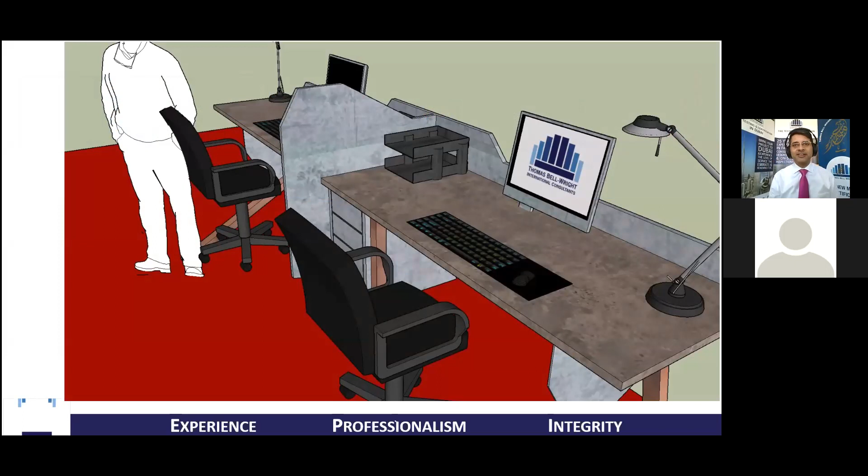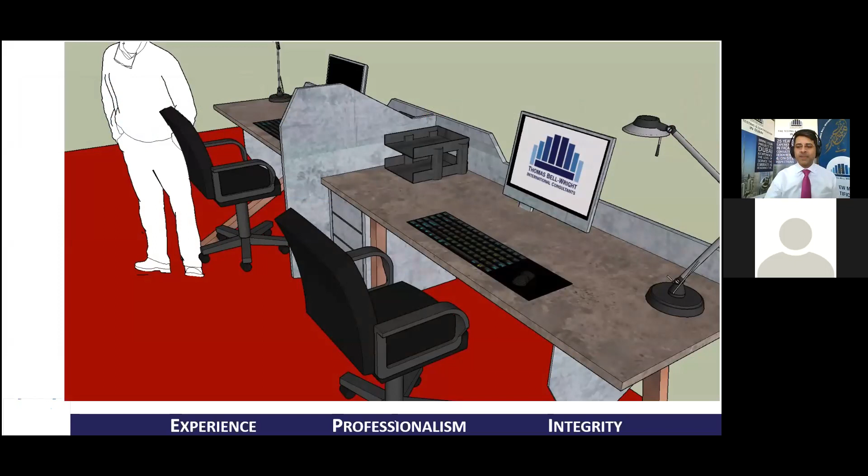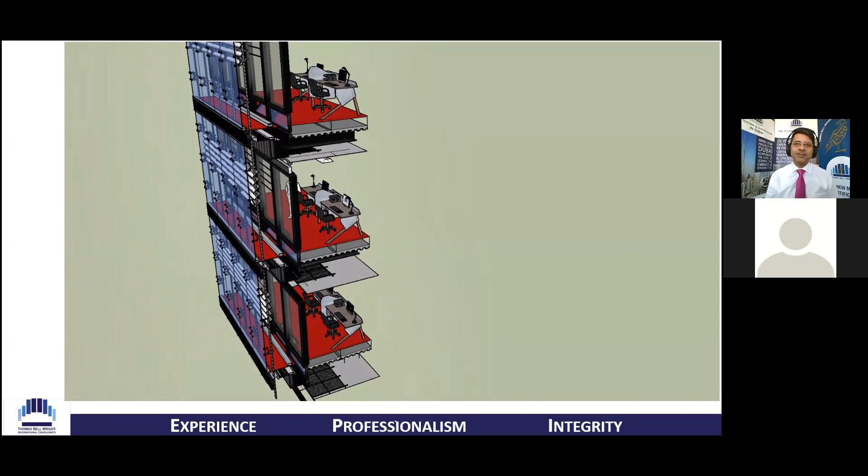And I'm going to start with talking about perimeter fire barriers, as the industry around us has had a very increased sensitization to building envelope and cladding fires. This is a subject that often pops up. And I'm going to begin with talking about the fact that, when we are sitting in our offices or homes, we sometimes don't quite realize the complexity of the systems as well as the materials that are used to bring about very basic properties that we often take for granted.

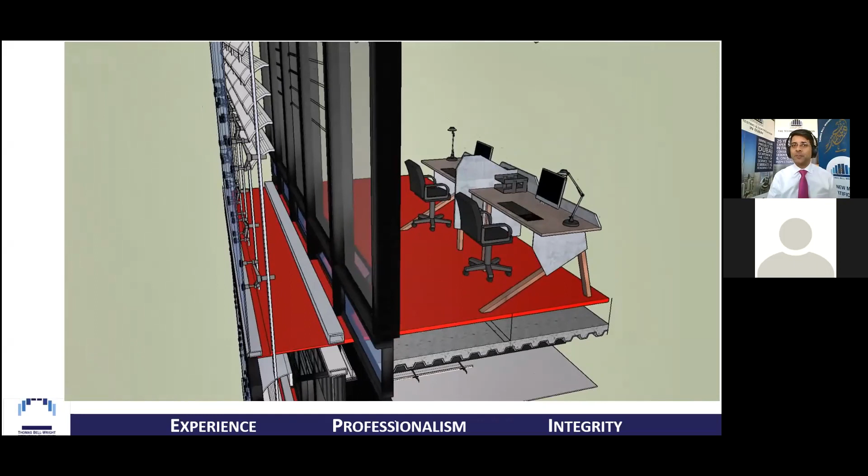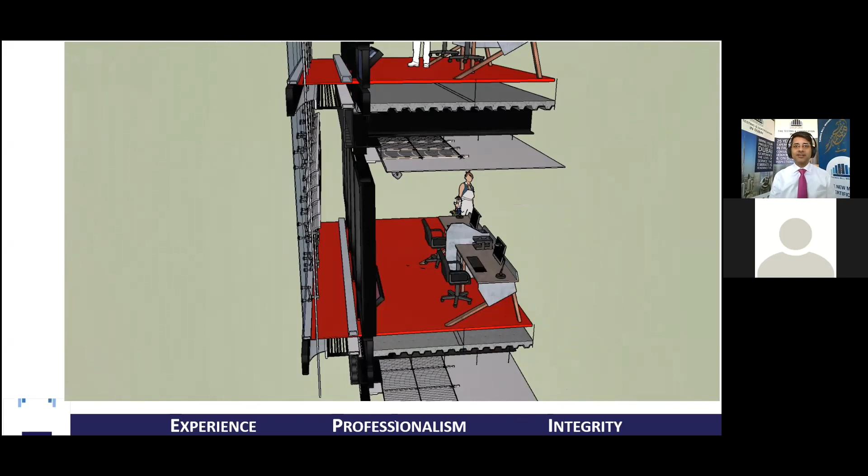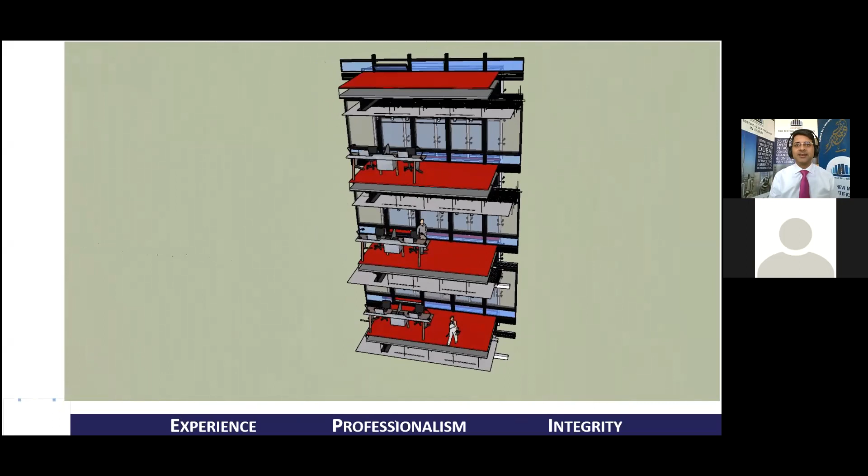The building enclosure or weather tightness or just the building comfort is one such thing where very often we forget what are the designs, materials, components that have been brought together to ensure a very large number of properties are delivered by the building envelope. So today we talk about one such material, which is the perimeter fire barrier.

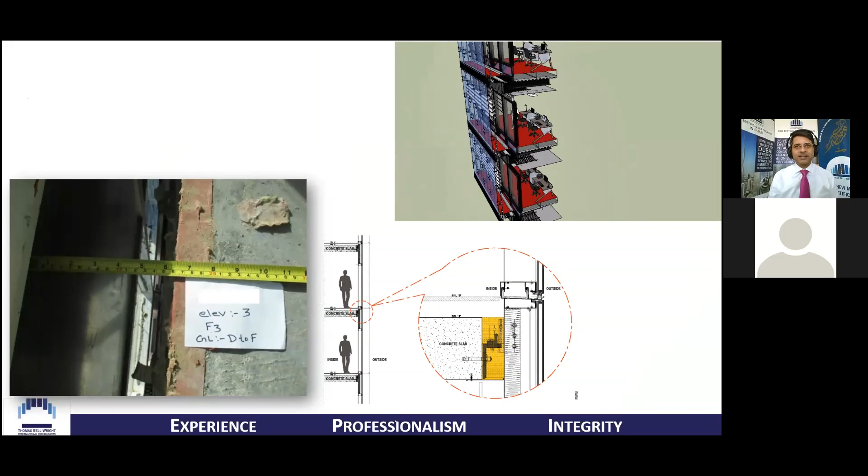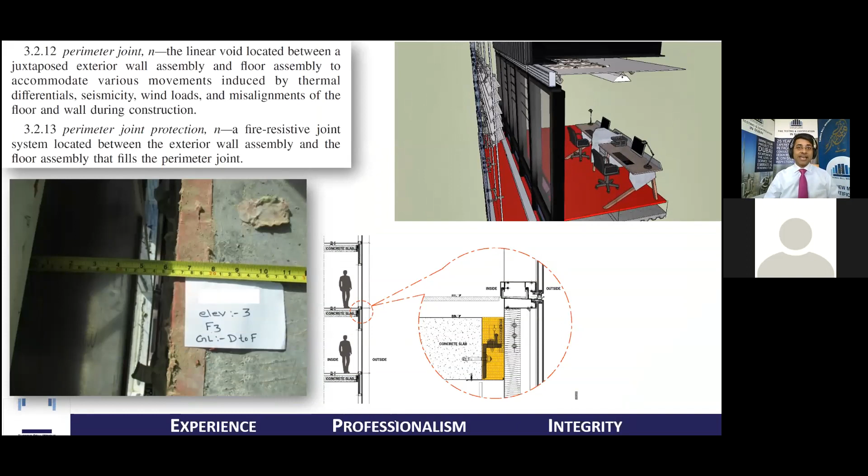The perimeter fire barrier is probably a relatively small looking material for a lot of people who may not even know. But its functionality is very, very critical to fire safety. What you see on the left as an image on your screen is a gap which remains from the slab edge to the building envelope or the curtain wall or the cladding system. And this slab edge is filled in with several types of materials with more than one functionality, but one such functionality which is very important for fire safety is the perimeter fire stop.

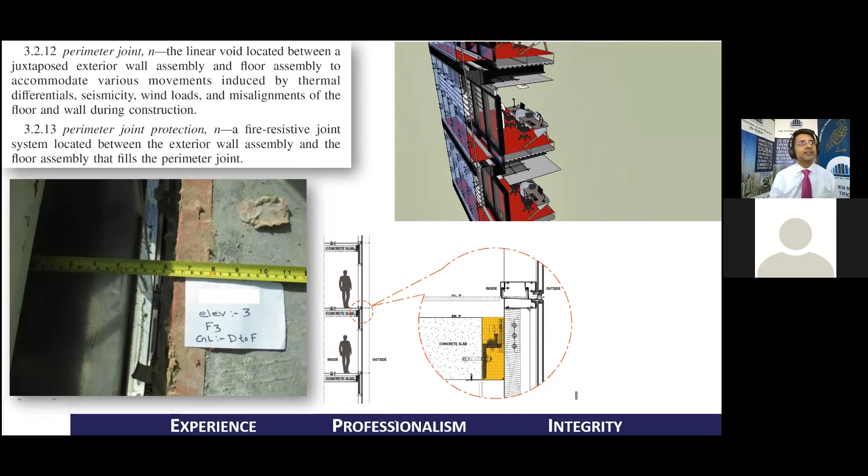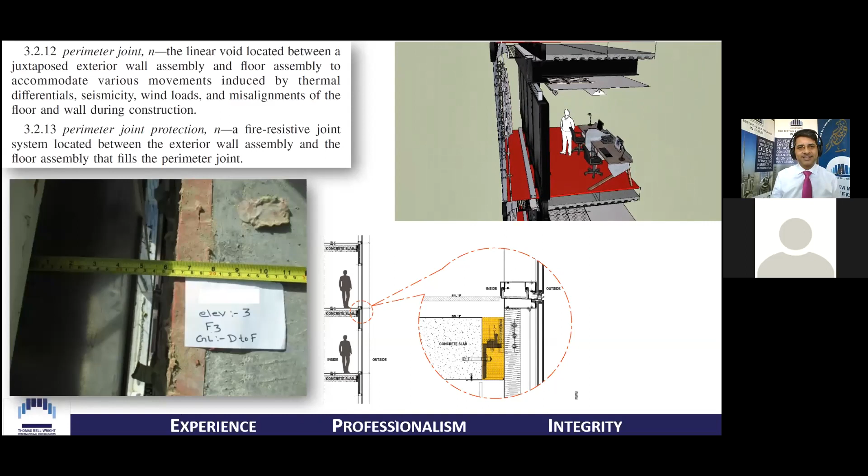The definition that you see on your screen is from the American standard, the ASTM E2307, which defines the perimeter joint and perimeter joint protection. And we today will be talking about fire resistance and compartmentalization as a characteristic which needs to be brought about by this material, which could be one material or a combination of materials.

So as we begin our journey, I would like to open a small poll for everybody in the audience. I hope you can see this poll on your screen. This is really going to be helpful for me as I talk further today through the course of my slides, as the people who've logged in come from many different professions, many different educational backgrounds, as well as many different focus areas. And the subject that I am planning to cover is or can be a bit too technical. So it would really be helpful for me to know where the audience is in terms of understanding and to what depth should I go and what kind of examples I should be taking through the course of today's session.

A few more people who are left to vote. I would encourage you to finish off clicking the buttons. It's a very simple poll to understand how many of you would understand drawings or renderings, or how many of you are the kind of people who would actually be at the construction site and be very familiar with some of the pictures on the top and bottom right on your screen. So thanks everybody for clicking in and voting in.

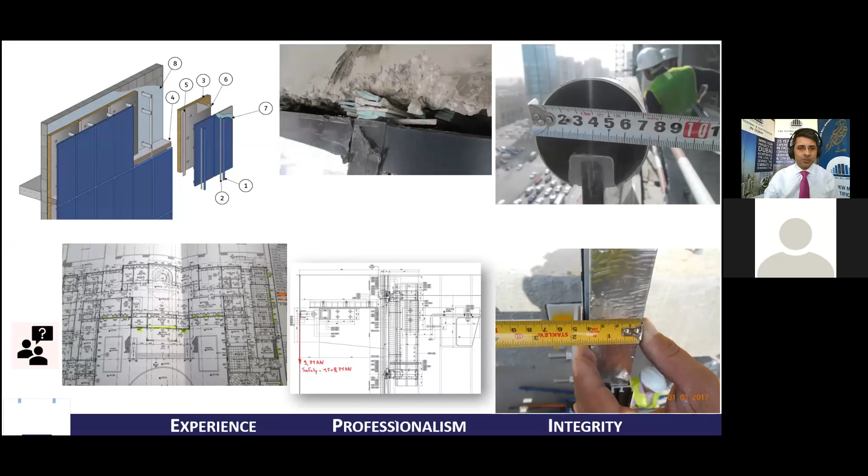Let me move forward to talk about a concept which is sometimes not very well understood: the fact that building envelopes, like several other complex systems, are often made using materials coming from far and wide, materials which are often manufactured or batch manufactured in factories, sometimes close by, sometimes far away. And many of these materials are able to demonstrate repeatability in how they perform and their capability. And often these materials are used to design one of several types of systems. As well as this, the assembly and the installation is probably done by some other people. So it is often missed out how the connection between all these three comes together.

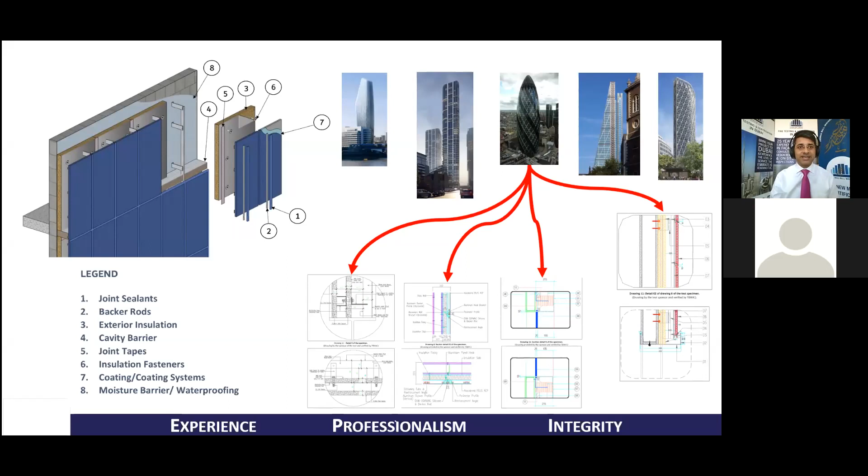A lot of you have replied back in the poll that you are very well familiar with curtain wall systems and designs. A good percentage of the attendees are probably very well aware that when a curtain wall system is brought together, it is sometimes few dozen or hundreds of different drawings in order to bring about the final building envelope. And hence, we must understand that the material property and the resultant system property can be very different. The same set of materials could give several different combinations of resultant property based on how they are brought together, how they are installed, and also very important, as people are realizing now, on how they are maintained. So with this as a background, let me jump to fire resistance or compartmentalization as a concept.

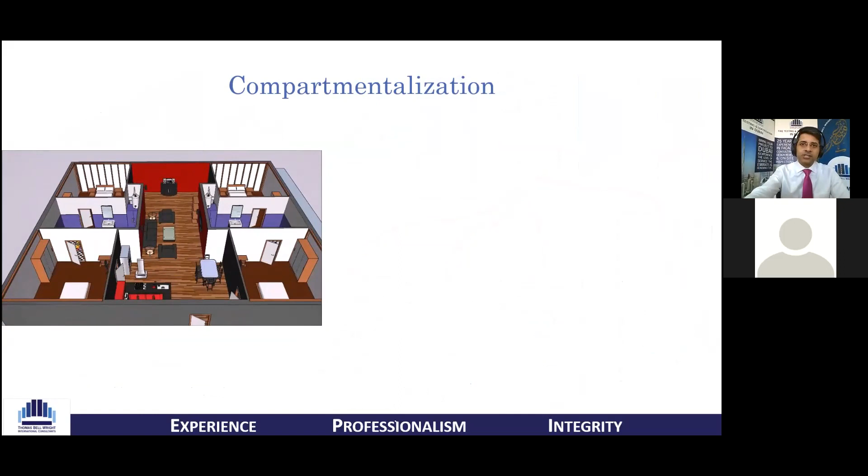A short video is running on your screen. I would encourage all of you to try and imagine, wherever you are sitting. You could probably be in your office. Imagine if there was a fire that happens right here, or in the video that you see, how the fire would go around, and whether the fire as well as the smoke can be contained within the area where the fire has broken out. And the reason I want to show you this video is for you to think and just imagine around you how the compartment might actually be getting into place.

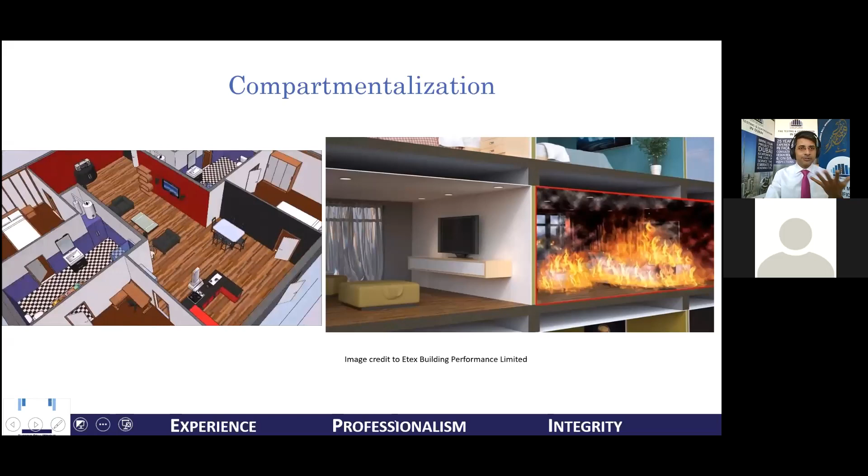And the reason why I wanted you all to visualize all of this is because the product or the system or the assembly that we aim to test in order to validate the performance of fire resistance or compartmentalization is often not a very straightforward system.

Some of the videos that you see are kind of renderings using SketchUp, but in real life, all of you are aware that ensuring that a system is going to come out, perform, and live all through its life can get a bit too complex.

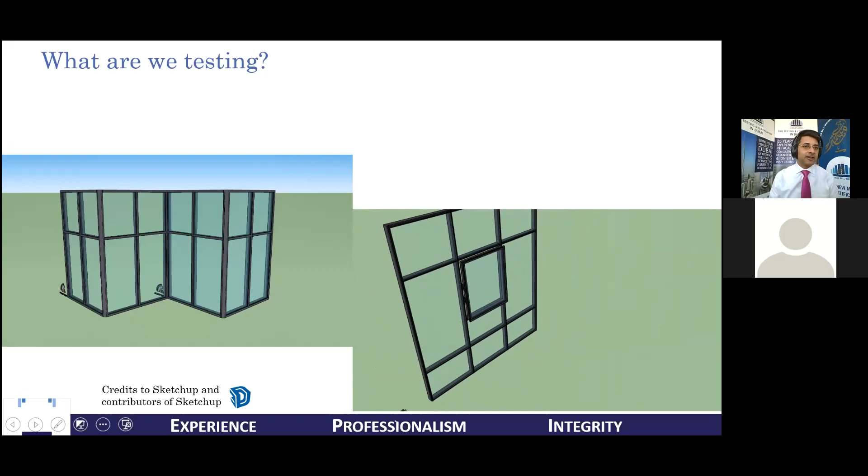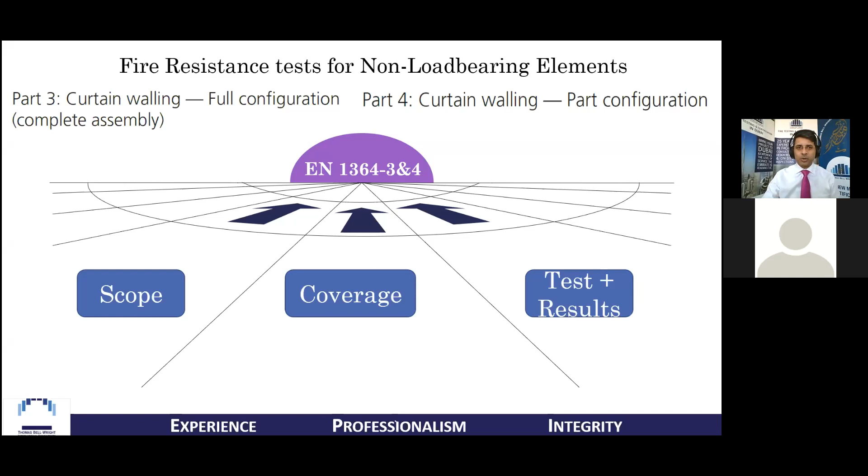So with this as a background and an understanding, let's jump to the two key European standards. These are the standards which are used for the evaluation of the perimeter fire barrier as well. And as I talk about these two test methods, I will generally and roughly cover what they cover, probably not in great detail, but the aim, as I said, is to talk about the perimeter fire barrier. There are two different standards. There is EN 1364-3 and -4. These two different standards are for the full configuration or the part configuration of what can be tested.

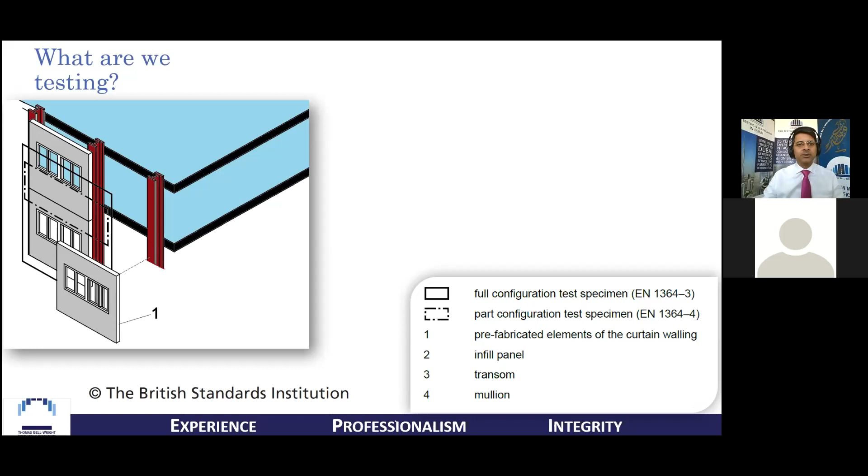And many of you are familiar with the fact that curtain wall systems or building envelope systems have several materials and elements, and an extremely large number of combinations that can be used to bring about the properties. So let's begin with a general understanding before we get into testing. What you see on the screen is from the standard. The solid line represents how a full configuration will test a part of the curtain wall or the cladding system, whereas the dotted line gives you an idea of how a part configuration test is done. Here is another image of another type of system that can be tested.

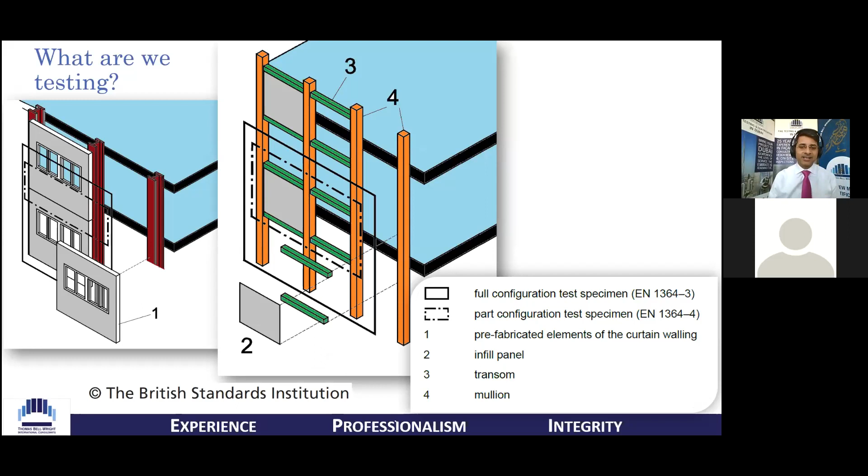You would notice transoms and mullions in this, and you can very clearly imagine that the potential combinations are an extremely large set. So as I would not be delving into details, I would just be giving an overview. The -3 is for a type of system which is defined as a type B system. A type B system is one which has a fully fire resistant curtain walling system, which means the spandrel, the glazing and everything is fire rated.

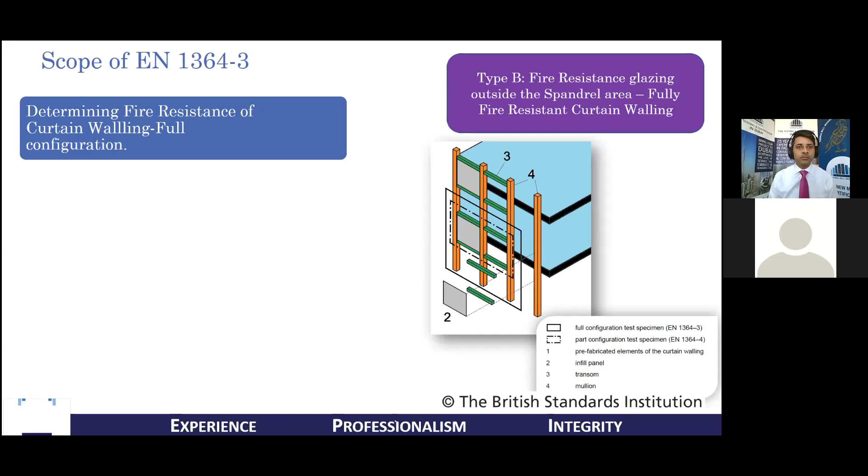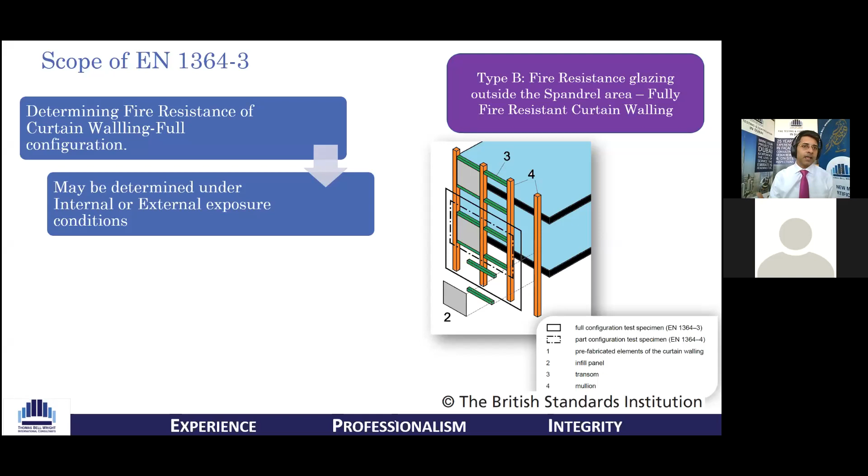Such a system would define a building envelope which will ensure that a fire breaking out inside a compartment will be contained within the compartment as well as within the floor. And it will also ensure protection if there is a fire that breaks out in the adjacent building or outside the area where the curtain wall system exists. Because the complete curtain walling system is fire resistant, the whole system will be fire rated, and hence the test method gives a methodology of how it can be tested for an internal exposure as well as an external exposure.

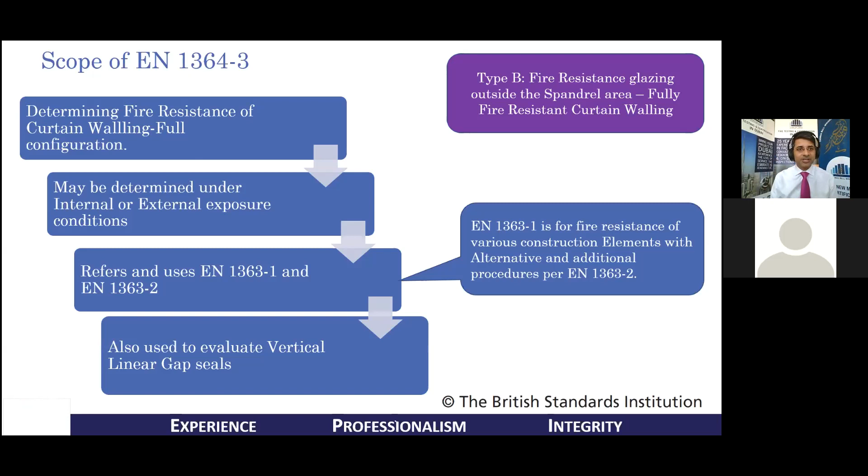Point to be noted is that these two standards, the 1364-3 and -4, point to two other test methods, 1363-1 and -2, which define the general methodology of how fire resistance testing of various construction elements, as well as alternative and additional procedures, is to be conducted. And hence, this test method cross-references another standard. While the test can be used to evaluate the complete assembly, the complete system with all the components, it should be noted that the test method is also used to evaluate vertical linear gap seals.

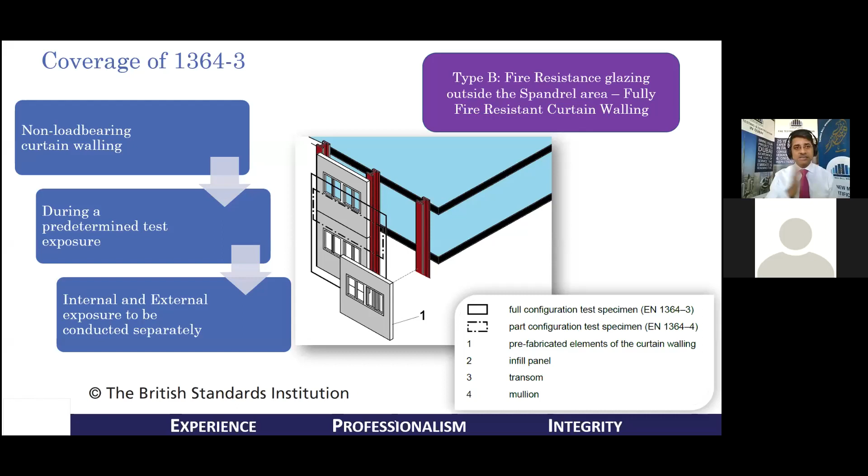It should be noted that the coverage of the standard is for a non-load bearing curtain walling system, and it creates a predetermined exposure, agreed to and verified by everybody who has participated in the evolution of the standard, of the fire exposure that the system will have to withstand. As mentioned, the internal and the external exposure need to be conducted separately as two different tests. It provides a conformity assessment for a curtain wall assembly which is only type B.

Many facade systems, curtain wall systems, have many faces and several different ways that the facade looks out. So this standard is for a faceted curtain wall system and provides several ways in which many different design elements can be tested in a single test. The test method does not provide any compliance or conformity assessment for a double skin facade, an overcladding system or ventilated facades on the external walls. It does not evaluate any reaction to fire behavior of the curtain walling system.

Moving to the part 4 standard, which is EN 1364-4. This is used to evaluate a system which is called a type A system. A type A system is one where the glazing may not be fire rated, but the spandrel panel is fire rated, which means only the spandrel area, which would also have the perimeter fire barrier and all the design elements that ensure that the fire does not break out from one floor to the adjacent floor above or below, is validated through this test. This test is applicable in those scenarios where it is not required to consider that fire can intrude into the building from an adjacent or outside building.

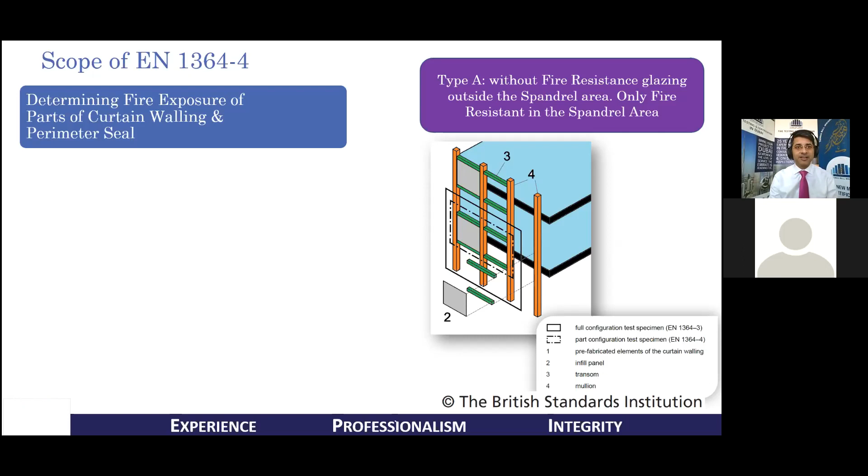This test method focuses very specifically on the design elements, materials, components, and systems arrived at for the spandrel area of the curtain wall system. As mentioned, there are several design elements, like the upstand and downstand or the combination, fixing systems, framing systems,

which are used to ensure that the system deployed will be able to help contain the fire within the compartment. The beauty of curtain wall systems, the way they have evolved in the last two to three decades, is an extremely wide variety and combination of different materials, design methodologies, and components, many of which are repeatedly used or designed to be repeatedly used in several different configurations.

This possibility of repetition of designed elements is what is behind the development of such test methods, because these test methods help evaluate materials as separate, designed systems as separate, as well as the complete designed assembly as one option.

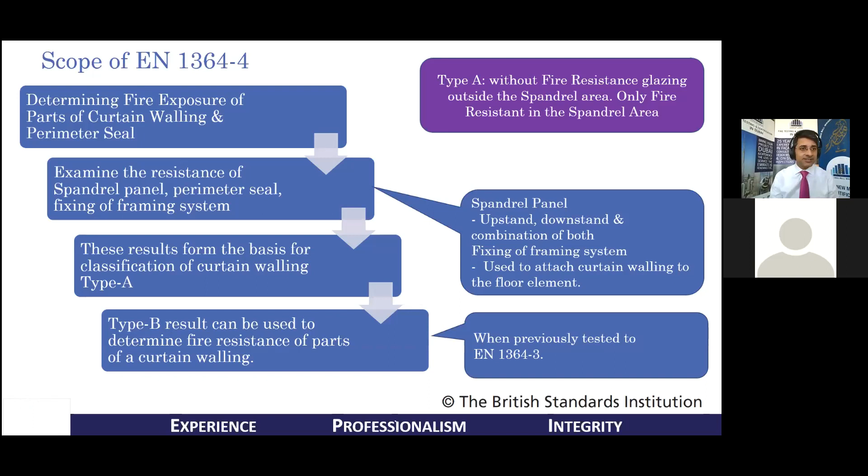As mentioned, these results form the basis of classification of a curtain walling system, which is type A. But I would also like to add that the type B result can also be used to determine the fire resistance of parts of a curtain walling system, and hence the other test described earlier can also be used for evaluating the components. It does test a non-load bearing curtain walling system, and the same as part 3, it is a predetermined test exposure.

A single test can cover conditions of internal and external exposure, because in this case, we are evaluating the behavior of the system only in the spandrel area. It provides for the spandrel panel, perimeter seal, fixing of the framing system, and also a combination of all.

As mentioned, this standard can be used to evaluate materials, designed elements which can be used repeatably in different types of systems, as well as systems or the complete system as well. And hence, these test methods have a lot of functionality.

This test method does not provide any evaluation for a double skin facade, overcladding system, or ventilated facade on external walls. Just like part 3, this test method does not evaluate any reaction to fire behavior of the curtain wall system.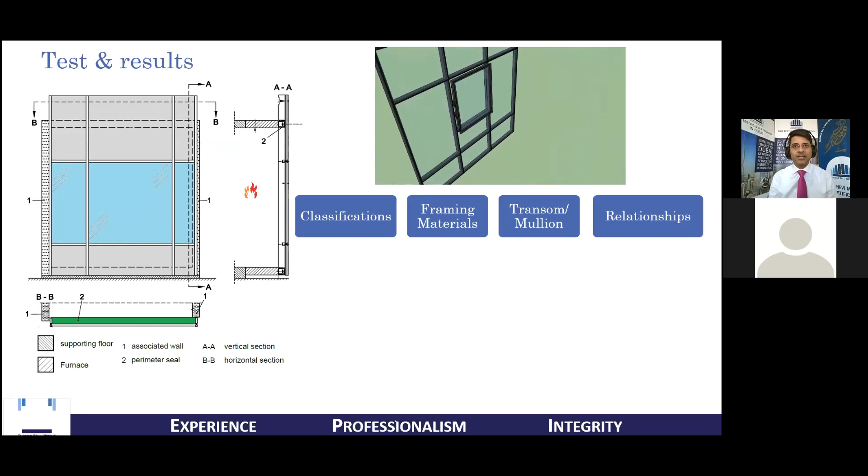How the tests are performed takes almost the largest part of managing and planning for a test like this. This is because these two European test methods provide an extremely wide array of options as well as combinations that can be evaluated.

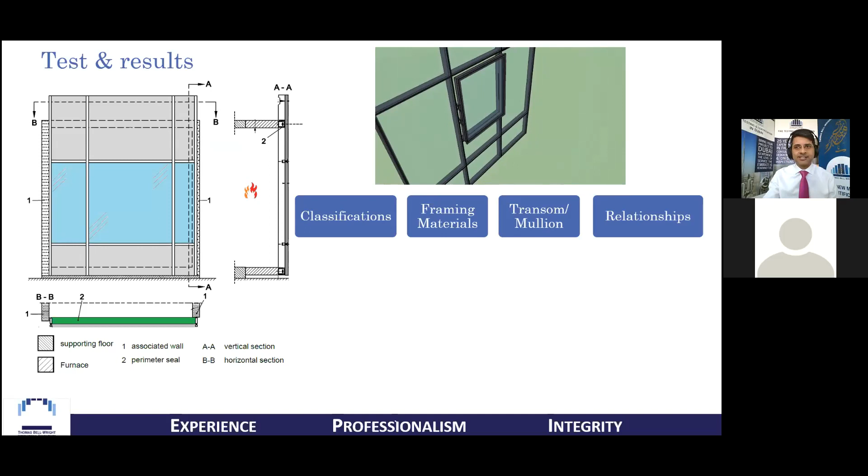On the screen, you see one of probably several hundred different combinations of tests that can be undertaken. Just to add a small, non-exhaustive list of some parameters: the classification of glass, the kind of framing systems used to design and build the curtain wall system, the depth and width of transoms and mullions, and the many relationships that evolve with different geometries, how members combine, the type of timber that may be used, the type of coatings that may be used, and so on and so forth.

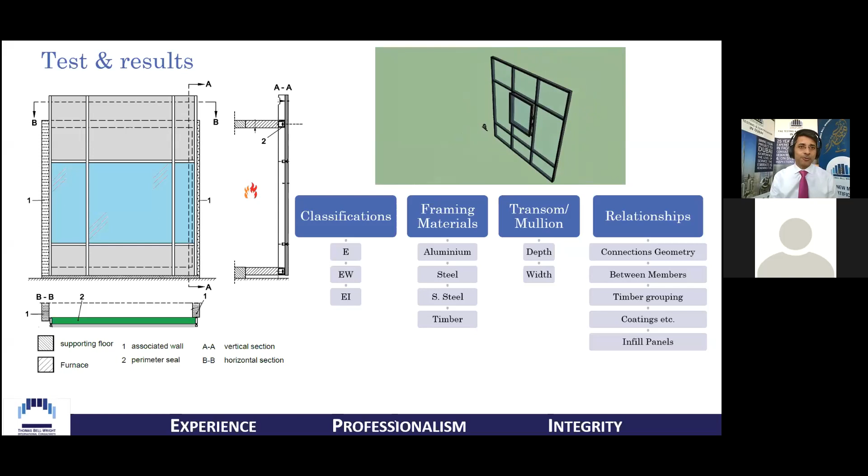In my opinion, tests like these are very exhaustive and often not used to the extent that they can be or should be used.

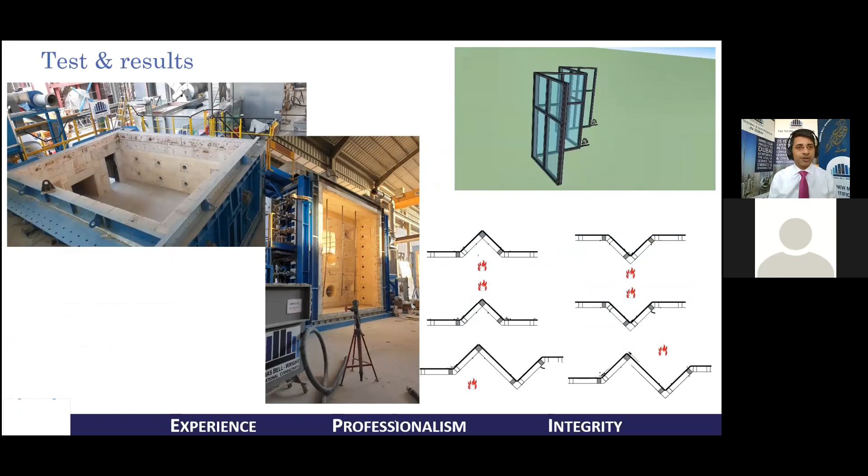On the screen you see two images of our horizontal and vertical furnace. The test method defines several ways in which these two furnaces can be used to build a mock-up. More often than not, it is this part of the project which would often take an extremely large amount of time.

Some of you who are very familiar with this test know that slabs need to be cast, which have a curing period. And because there is so much that can be drawn out of the test, people would like to maximize the expenditure incurred and hence try to position in and push through lots of different types of configurations.

Such a test is also very often used and can be used in a place like UAE, where time is of prime importance, and the designed end result may not always be assessed for conformity by using certification and listing or the standard approvals, which are used more as a trade regulated mechanism between countries.

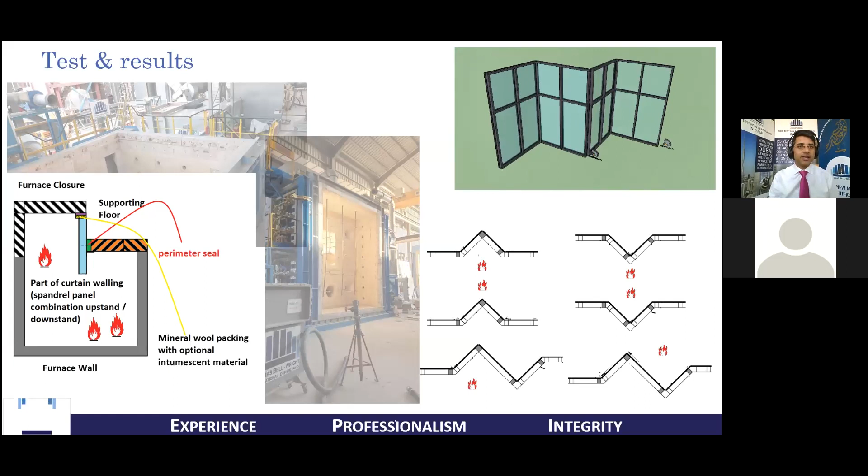And hence we see, and we are seeing more and more systems where the consultants and subcontractors, who do not want to take on liabilities which are now adding to their portfolios because of the fires coming in, would opt for a representative test for a given project.

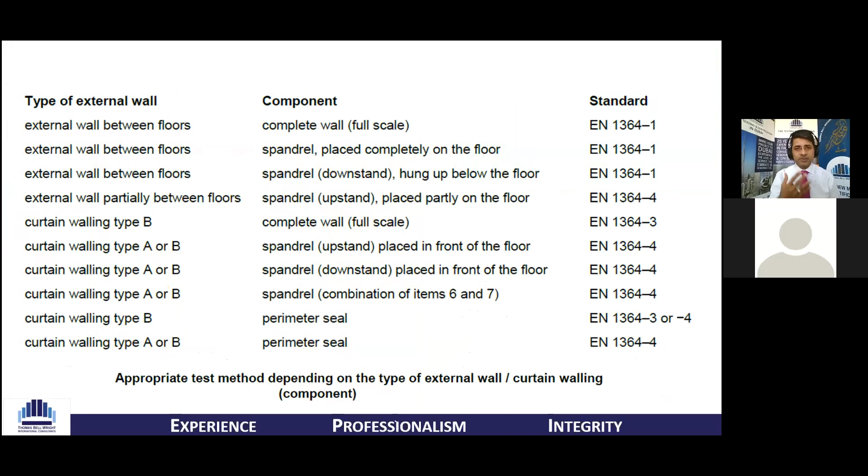I'm also reproducing a table, one of several tables which are there in the standards. I know the webinar is getting recorded and attendees can look back at this table to understand combinations, but this is not at all exhaustive, and we can go into detail one-to-one when required.

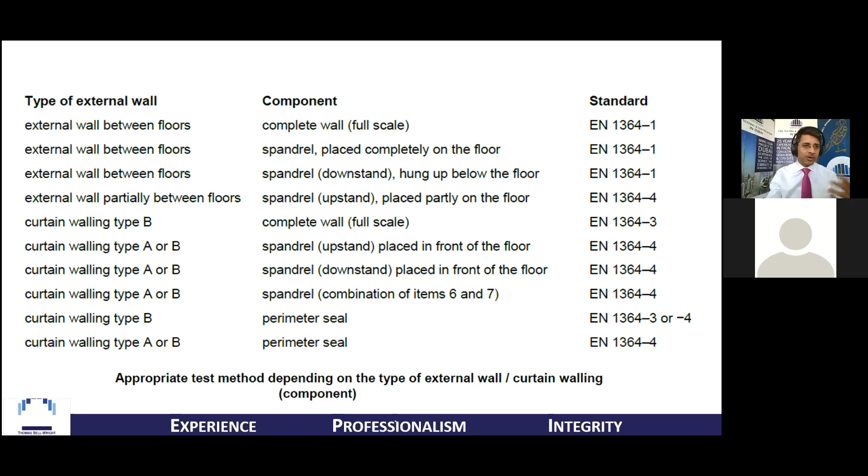Pass or fail, or a classification can be given, but often for the European standard and for the European tests, the results can be used to draw out a very wide variety of inferences.

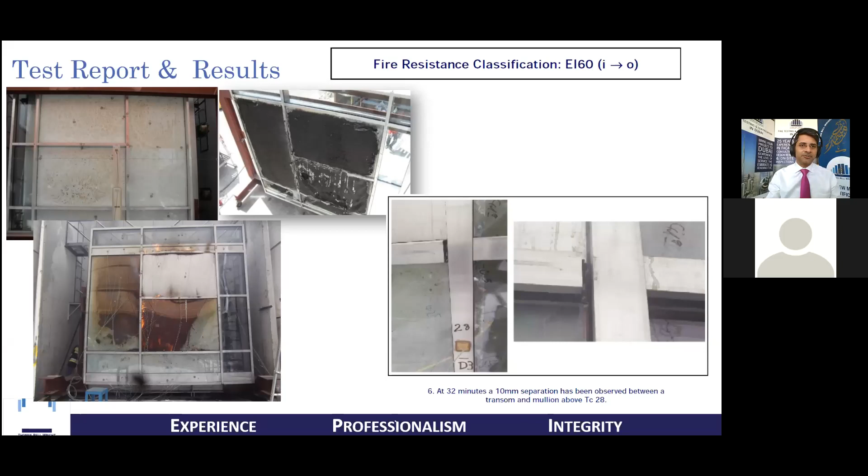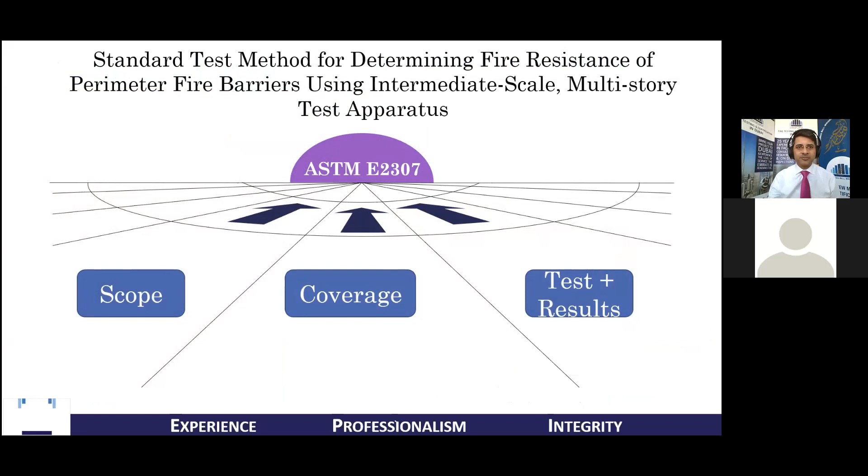Moving on, as my friends in the UK would say, across the pond to the United States, we would look at another test method, which is the ASTM E2307. And unlike the European version, this test method is very, very focused on just the perimeter fire barrier, testing just the perimeter fire barrier.

So I'm going to read out a bit of the scope. The test method measures the performance of the perimeter fire barrier and its ability to seal to prevent fire spread, during the deflection and deformation of the exterior wall assembly and the floor assembly during the fire test, while resisting fire exposure from the interior compartment fire, as well as the plume which gets emitted from the external window opening.

I must add something which I probably should have detailed at the beginning. The European test method is conducted in a standard fire resistance furnace, which is a vertical or a horizontal furnace, as shown in some of the slides earlier. And these furnaces are used for fire resistance tests for several other containment elements like doors, partition walls, fire stopping, etc.

Whereas the American test method uses a very unique test apparatus, also known as the ISMA, or the intermediate scale multi-story test apparatus, which is used to evaluate the fire propagation behavior of cladding as well.

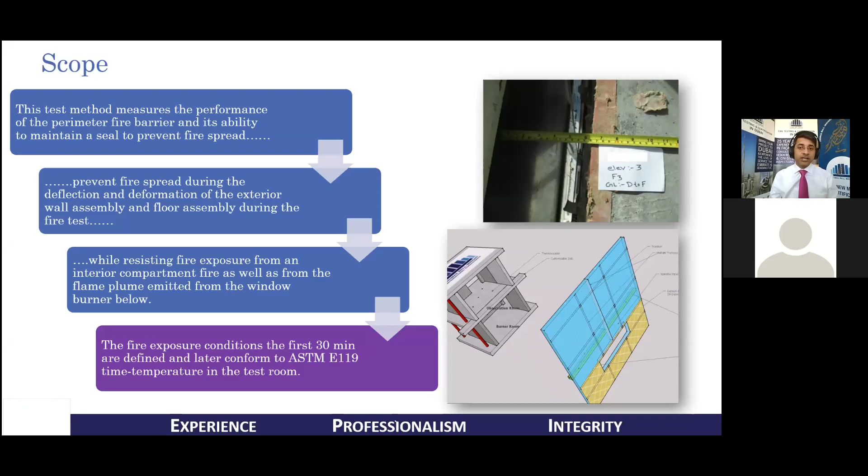And hence the image that you see on the bottom right, where you can see the mock-up which is to be tested, as well as the intermediate scale multi-story test apparatus, is the bottom compartment, which replicates a fully developed fire that would exist and needs to be contained.

In this test, the cycling conditions are limited to only what is tested. The cycling is more clearly and openly defined as compared to the approach of the European approval and the methodology by which you would demonstrate the behavior of cycling before the test. The assembly behavior is what is evaluated.

In this test, measurements are done only for the specific test conditions, and this test is defined such that it should not be used as the only selection criteria for a perimeter fire barrier.

The test does not, and is very clear to define that it does not quantify the contribution to the fire hazard by smoke or toxic gases, nor does it quantify how much smoke is produced. It does not quantify the rate of flame spread or fire propagation, or the durability of the test specimen. It does not cover the effects of load on movement or cycling, or cover rotational, vertical, or horizontal shear capabilities.

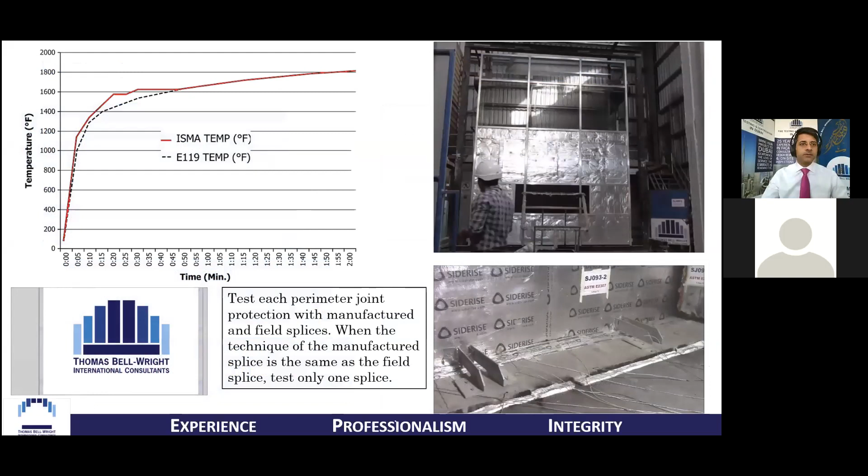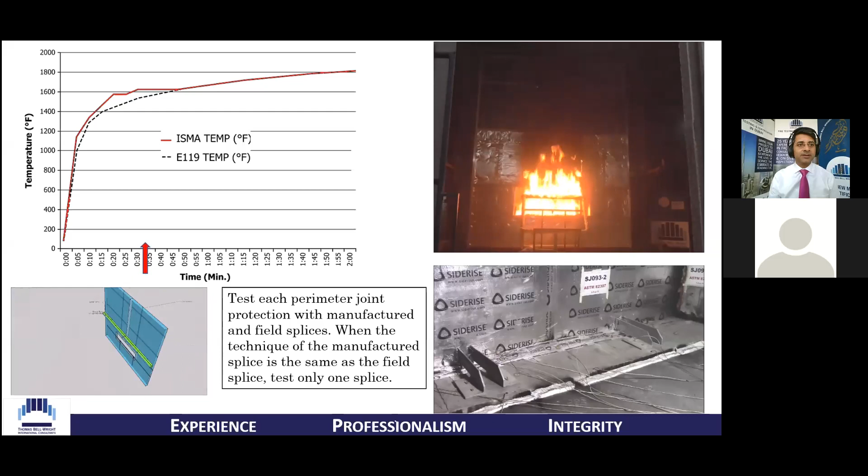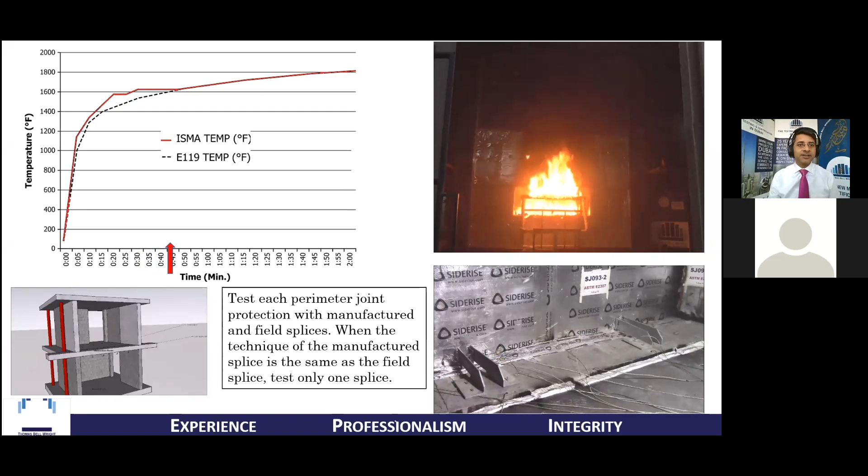Here you can see on your screen lots of movement. On the bottom left, you see almost like a fast-forward video of how the test rig is mocked up and various positions where thermocouples are put in place. At the top, or the main part of the screen, you would see what we call the time temperature curve. The red pointer shows how, as per time, the temperature inside the furnace moves on and increases. And as you would notice, this test method is very, very different in its approach to how the test is conducted to evaluate the behavior of the perimeter fire barrier.

The external plume, which attacks the spandrel area, as well as the bottom room where the ASTM E119 related environment is created.

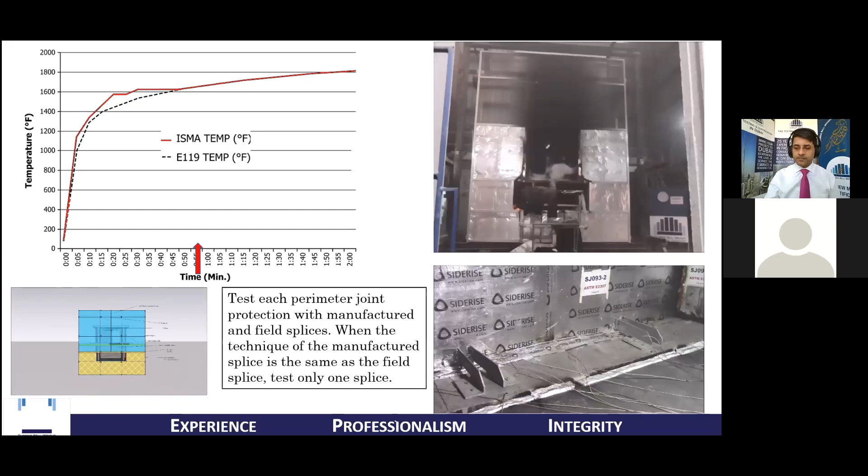The conditions of compliance are several. If movement cycling is done, its result is reported. The T rating and the F rating, as well as this test method, unlike the European tests, can allow for the perimeter fire barrier to demonstrate its performance under the load condition of the perimeter fire barrier.

The comparison of the two tests, which is very often asked, unfortunately does not have a straight, simple answer. As I went into much greater detail describing the European test compared to the 2307 in a webinar last year, apart from the clear fact that the American standard looks at how a loaded perimeter fire barrier would behave, unlike the European equivalent, the approach of the two tests is very different, both in understanding how conformity assessment or compliance is realized as well as understood.

Moving on, I'd like to talk about a subject critical to understanding the two tests as background: how conformity assessment or compliance is to be perceived and understood. Before that, I'd like to touch on a slide I always use to sensitize the audience to understand how codes of practice, methods, and guides are interlinked. Many of you are familiar with building codes like NFPA 101, ADB in the UK, the UAE Fire and Life Safety Code, and several other codes of practice, which set the minimum criteria based on recommended good practice currently undertaken.

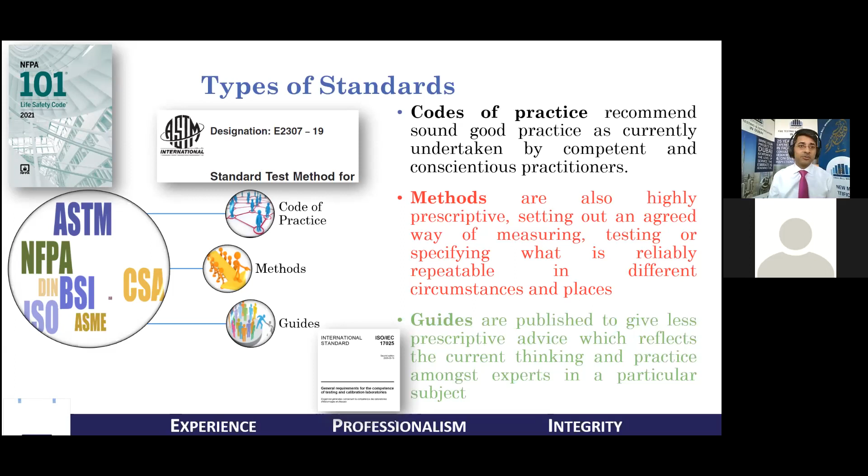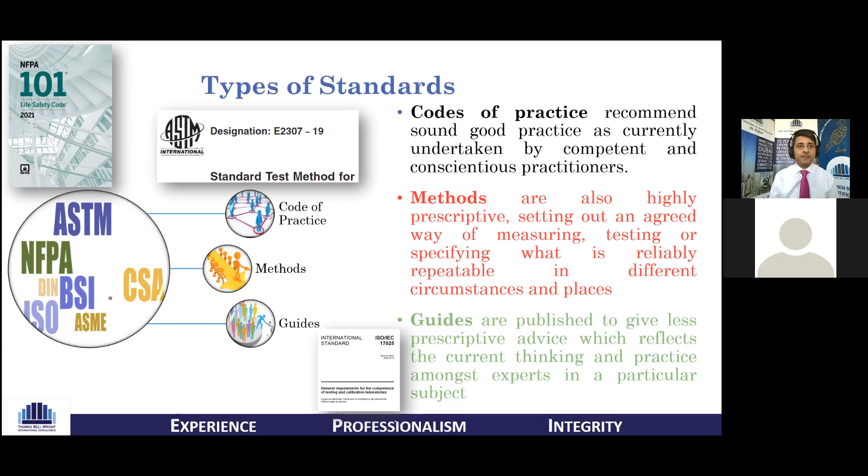Test methods are documents that evaluate, from a repeatability point of view, how a performance will be evaluated. If there is a test method evaluating fire resistance, it will evaluate repeatably using the exact same criteria and methodology, irrespective of different materials or systems being tested. Guides like the ISO 17025 guide for laboratories give less prescriptive advice and define generally how things should be undertaken. So this is the background before we talk about compliance and conformity assessment.

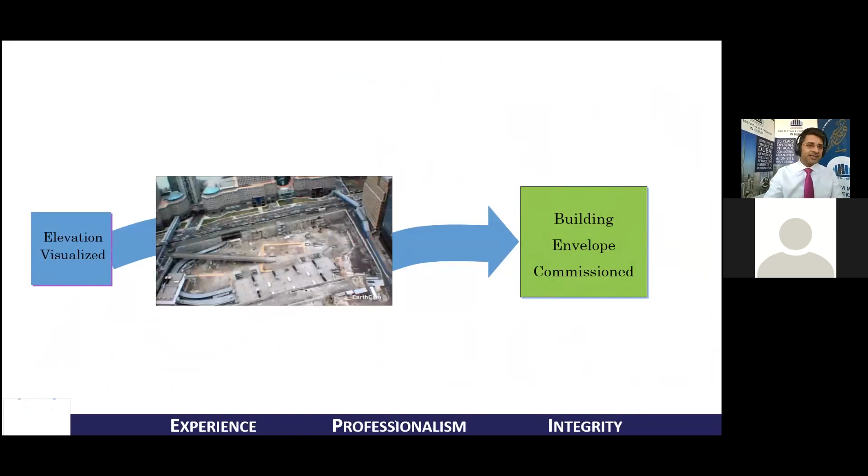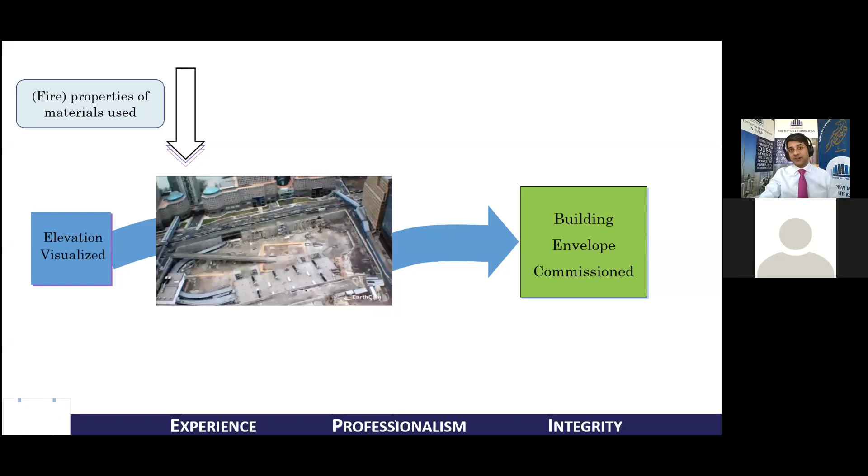So how do we ensure that for such complex systems and designs, fire safety is instilled? This starts with the fire properties of materials, meaning we need a very high degree of confidence in the mechanism used for assessing and ensuring that any material used to design and implement a desired system completes its promise of how it will behave on all grounds—physical, mechanical, and fire properties. Once this promise is fulfilled, it's on this basis that the second promise will live up to—the promise of experienced, and sometimes inexperienced, designers who bring together different materials to provide the end result and properties.

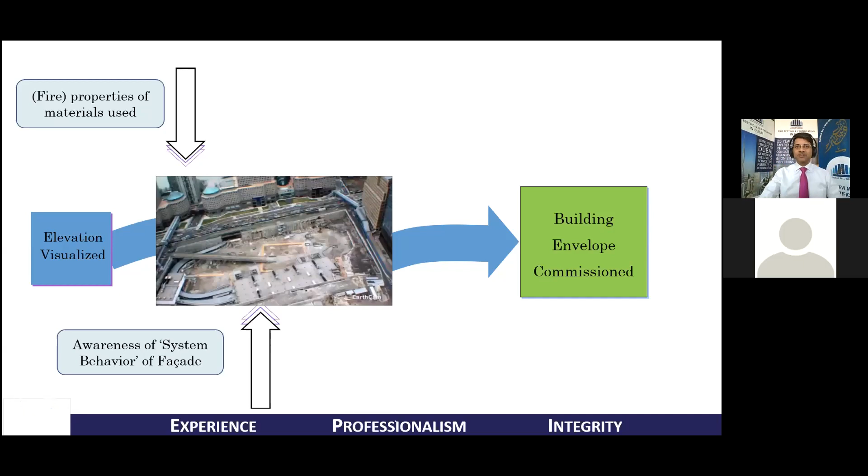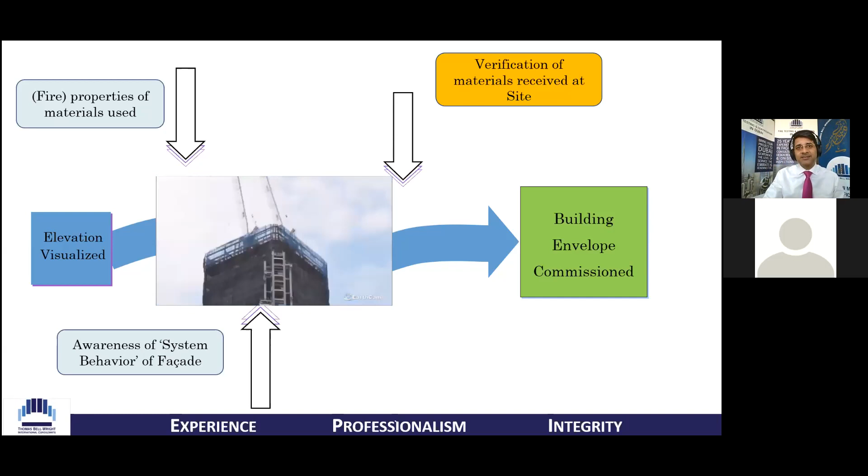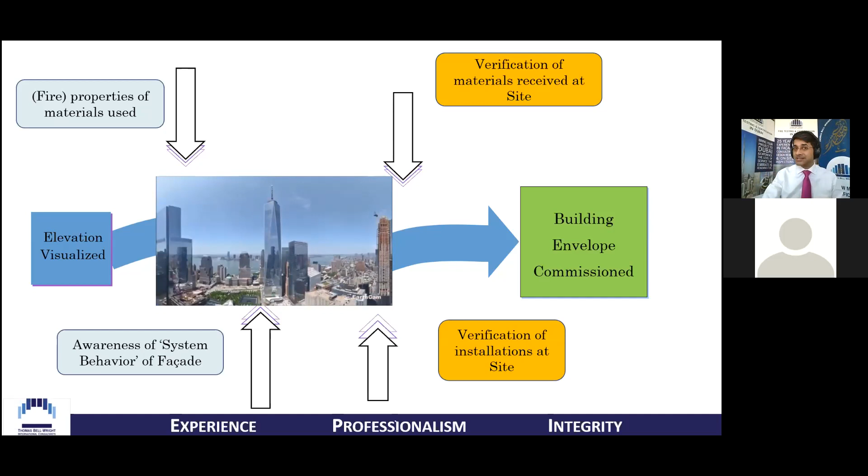This is where validation of mock-ups is very critical, because it's important not only to validate the design ideology, but to verify that the materials promised to live up to their name are really able to deliver what is designed. Then comes another challenge: ensuring that what has been designed and specified is exactly what reaches the final construction site. Hence this verification becomes extremely important. As is very much in the news nowadays across geographies, installation needs to be verified, and maintenance is also very critical.

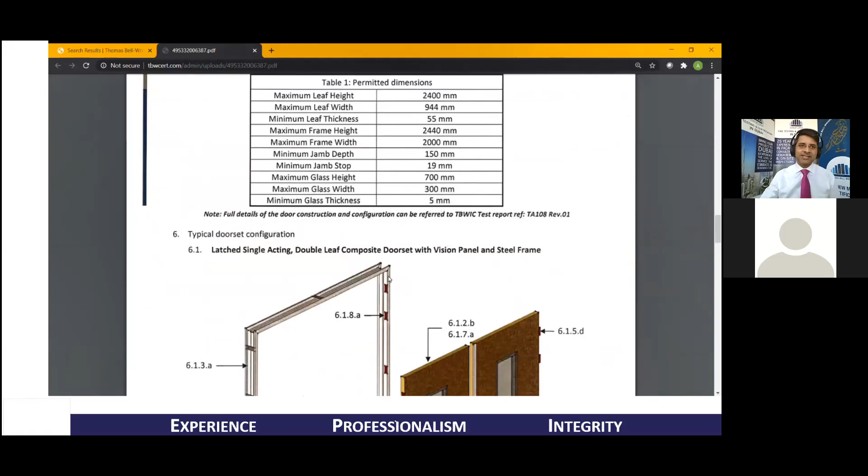I talk about certification and listing in almost all my workshops, and this is one of the most evolved methodologies of assessing the conformity of different materials, where through a process of certification and listing, the third-party independent body enables and brings about trust between the buyer and the seller by bringing in several measures and methods to ensure that if a seller going to a buyer claims that his product or material will behave in a given way, there is an online verifiable report which has assessed such a material to great detail by conducting tests as well as audits.

And it is not just from the certification directory or Thomas Bell-Wright. There are loads and loads of third-party certification bodies who employ very easy to use verification mechanisms, certification and listing numbers, traceability that is visible on the material at the site. And it is very quick and easy for you to look up the conformity assessment marks and numbers and verify that yes, the material which is being used to arrive at an evolved design will live up to what it is promising to.

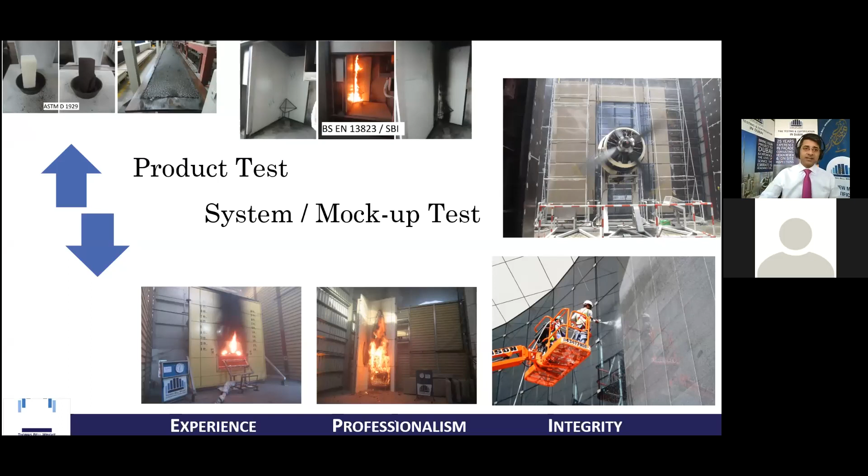And this is where we talk about conformity mechanisms for a system and how the complete system needs to live up to its promise. And this is validated through the system tests which are done. A lot of you are familiar with these design validation tests.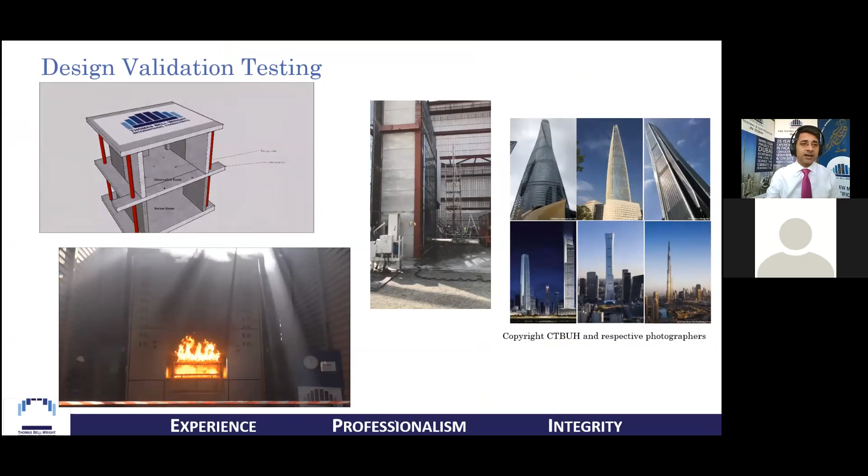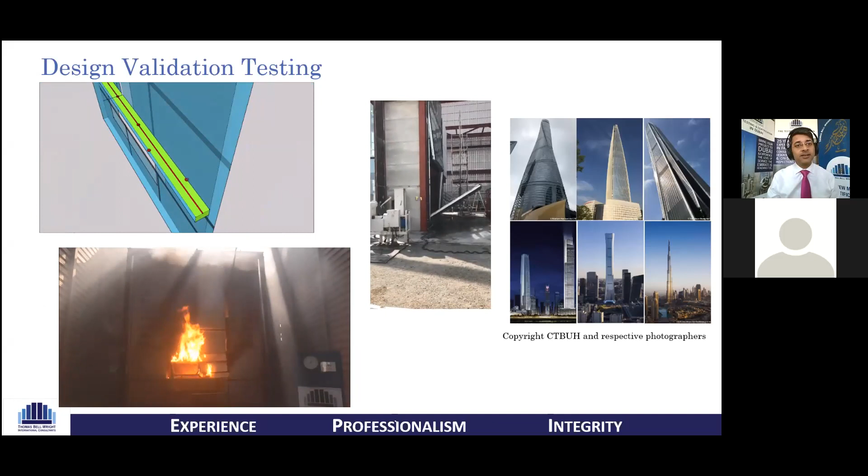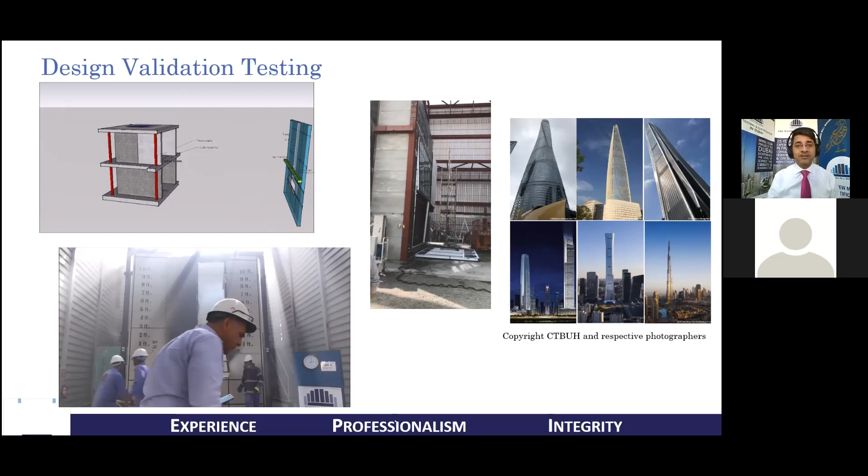On the screen you see a few videos running, some of which are talking about how these design validation tests are conducted. And all these tests, they just end up validating that the materials that were procured, which could have been perfectly good materials, are able to be installed in the way that the end result wants them to be. Mind you, some of the failures that you see on your screen, the fire test where almost the panels exploded off in the NFPA 285 test - we were very sad, but it is a reality that the same set of materials, exactly the same set of materials, were able to comply to the same test just by redesigning the system and much better installation.

And hence, it brings me to the last section of today's session. And I want to open a very small, quick poll. I want people who've logged in and are listening to just quickly tap in the replies and say yes or no to this poll that I have opened.

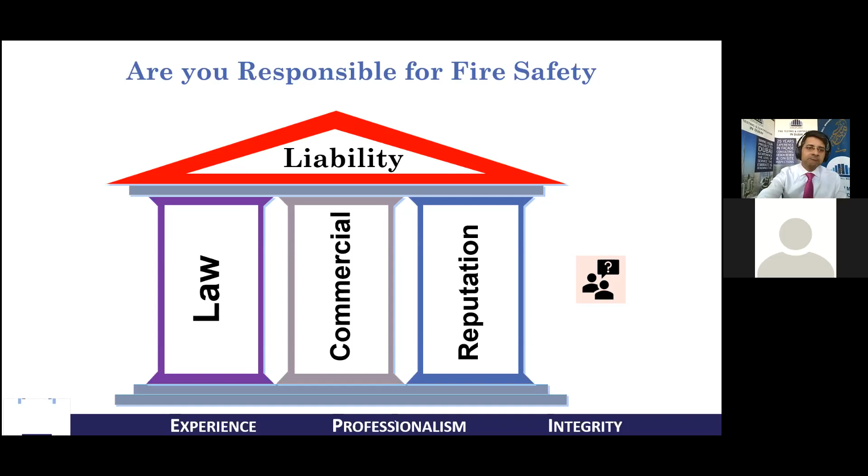This poll will help me understand, as listeners, all of the people who are logged in and have been here online for the last 40-50 minutes, how exactly you can benefit from what we talked about today.

Because the only two ways in which responsibility can be quantified to prevent liabilities coming on your organizations are the specifications and the contract. These are two sets of documents which are almost in your hand, in your control. I see a good percentage of people in the audience are responsible for either implementing or writing specifications or contracts.

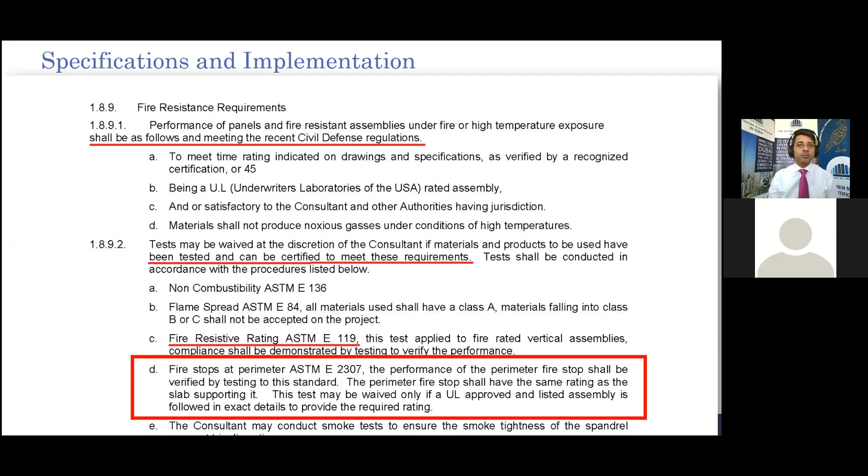And all of you must know that it is the specification document which is probably the governing document. It is the place where conformity is assessed. It is the document which defines how conformity should be proven, should be assessed. So I urge everybody who really feels in any part of their mind or heart that fire safety is important, to pay a little more attention to the specification document and how quality assurance is validated and checked on the site.

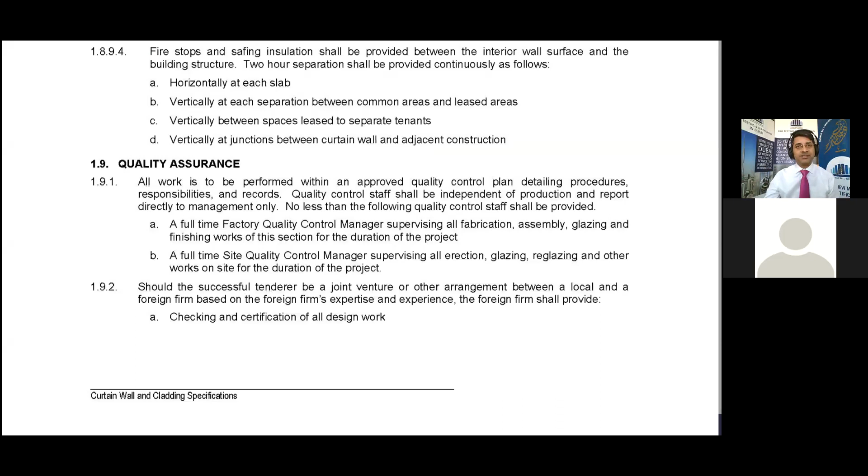Many of you would have noticed and seen that when the times are tough, like 2020 and now, across the supply chain of the construction industry, right from developers, contractors, consultants, project management companies, also in the light of what has been happening around the world when it comes to awareness about conformity and conformity assessment, or lapses in conformity assessment, which have led to big catastrophes, are leading to learnings among people.

So I'm going to conclude with a few points which will help listeners understand how conformity assessment should be clearly defined in specifications as well as contracts. So what you see on the screen is not only telling or guiding that the conformity assessment mechanisms should be clearly defined in specifications - the responsibility should be defined in specification, not just for delivering documentation, but also submitting proof in the correct order and in the correct way, as well as there has to be a linkage with the commercial contract, because until or unless there is a commercial implication to conformity and conformity assessment, the importance, unfortunately, is very, very low.